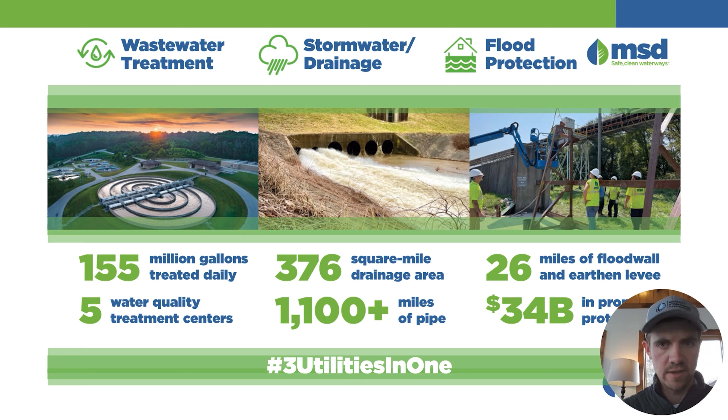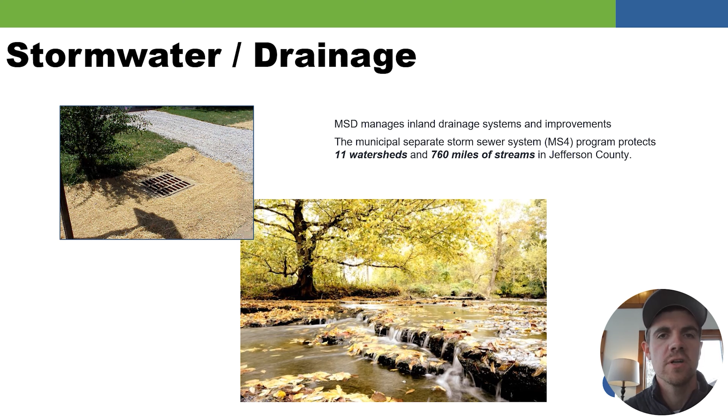All right, our post-construction runoff requirements are probably very similar to most of your communities. Our permit requires treatment of the 80th percentile rain event runoff volume from newly constructed impervious surfaces. The 80th percentile rain event for Jefferson County was set at 0.6 inches. This is only applicable to all development with disturbed area equal to or greater than 1 acre, including projects less than 1 acre that are part of a larger common plan of development or a common scheme of development equal to or greater than 1 acre. And this requirement started in 2013. So we have almost a decade

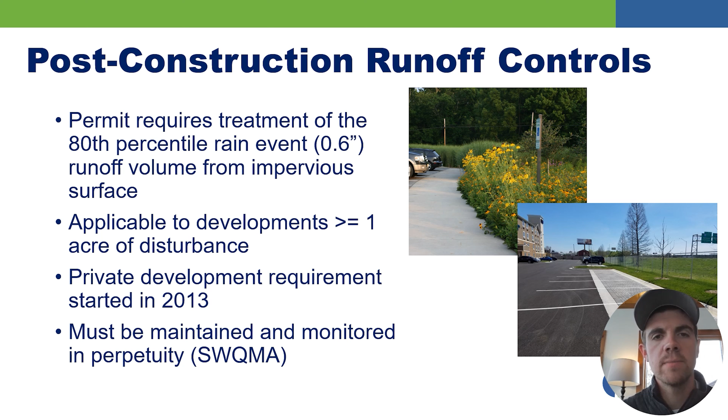working through this program. And I will also note that these BMPs must be maintained and monitored for the life of the impervious surface that was permitted. And we enforce this through an agreement with the developer or property owner, which is the stormwater quality maintenance agreement. And I'll talk about this a little bit later. And since 2013, we have added over 1,300 post-construction BMPs through this MS4 requirement. MSD also tracks the operation and maintenance of approximately 200 more BMPs that were constructed as part of our combined sewer overflow consent decree. These consent decree projects started in 2010, so MSD has about 15 years of experience managing post-construction BMPs.

And this is a map. This map is a screenshot of an ArcGIS Online map that we use to track inspections and enforcement for post-construction. And I will kind of jump into that shortly.

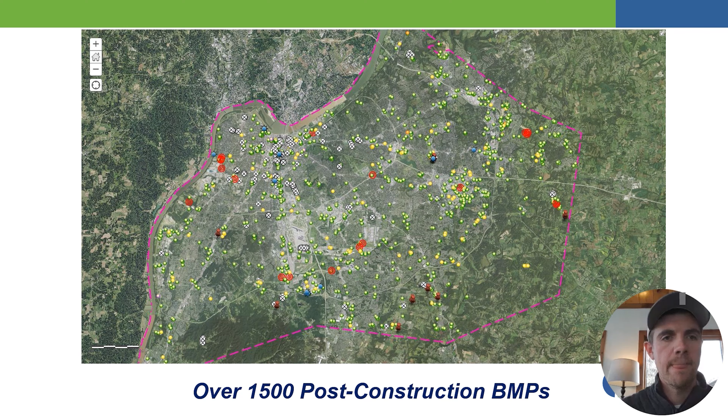All right, I'm now going to talk a little bit about how MSD meets the inspection oversight requirement of its MS4 permit. Our Stormwater Quality Management Plan, or SWQMP, currently states that we will inspect each BMP once per permit cycle. Knowing that the majority of these BMPs are not going to be inspected or maintained without a little push from MSD, it is MSD procedure to have these on a 2 to 3 year inspection rotation.

Currently, we are meeting this demand with one dedicated employee who conducts 400 to 500 post-construction BMP inspections per year. We also use a small consulting contract to supplement another 50 to 100 inspections per year. We were able to streamline the inspection process to meet this demand by going digital with the use of Esri ArcGIS Online mobile applications.

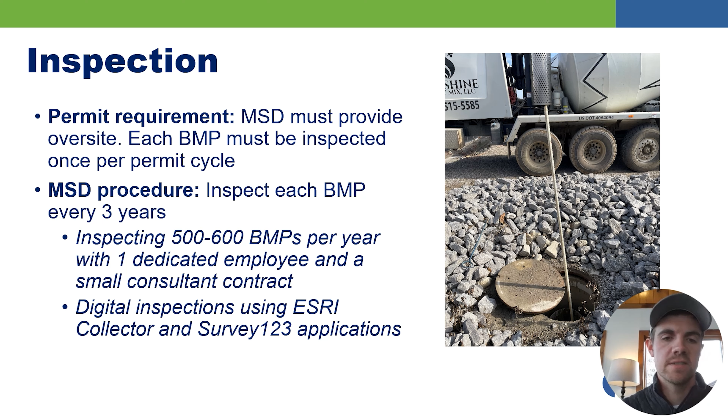And with having a GIS background, I could give a whole presentation on the benefits of ArcGIS field applications for inspection purposes. But for the sake of time, I'm going to keep this brief. At MSD, we have a database of record that our permits, assets, and work orders run through. And we use this database to create a dynamic and functional map in ArcGIS Online. And we use this map to track BMP types, locations, inspection statuses, inspection dates, among other relevant information.

And all of this information is easily accessed and edited from a phone or tablet using the Field Maps app. We've also been able to hyperlink construction plans and links to the recorded stormwater quality maintenance agreements for each BMP point. And we can easily make updates to a filter that allows us to meet enforcement deadlines in that 2 to 3 year inspection rotation. And this is something that can be put together pretty quickly and cheaply.

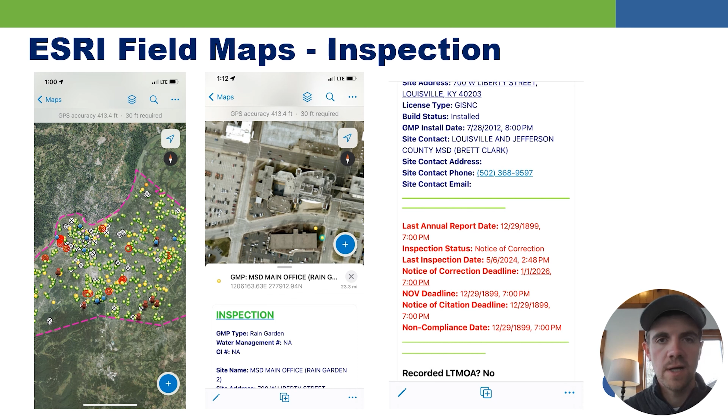And we have also created a hyperlink in the Field Maps app that allows us to automatically open and pre-populate the Esri Survey123 application for inspection. We have created a customizable form that allows us to log a full inspection for each BMP type and even attach pictures. And that inspection data is then stored in a database that can be accessed from the internet. And if needed, specifically when enforcement letters are issued, a formal inspection with MSD branding can be exported to a PDF, including those pictures.

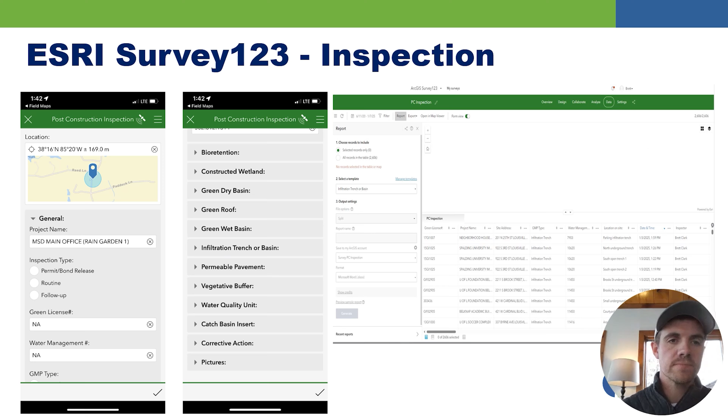All right, I'll hit on this a bit later, but we also require the property owners of post-construction BMPs to submit their own annual reports every July 1st. This has been challenging, but I think it has brought awareness to many of these BMPs for the property owners. And with that annual report, we ask for not only the inspection results, but also any documentation of maintenance that they've done throughout the year. So any inspections that they do have to be completed by an MSD qualified post-construction inspector. Again, I'll spend some time on this program a bit further in the presentation.

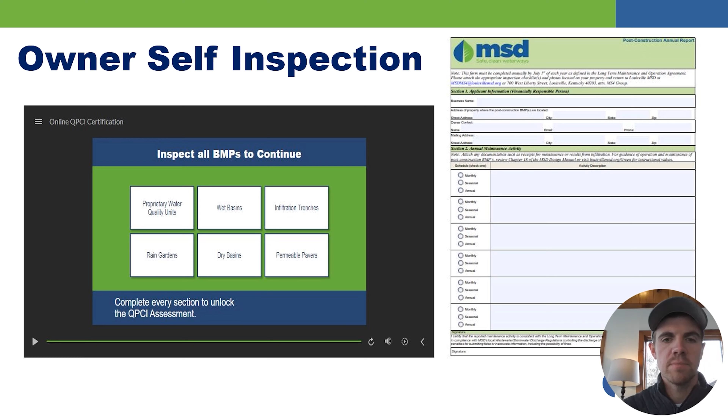Now I will hit on everybody's favorite topic, enforcement. Enforcement through our post-construction program has been a work in progress, but I do think we have developed a consistent process that works. If we go out and determine that a BMP is not meeting design standards, a notice of correction letter will be issued, and that gives the property owner 60 to 120 days to bring the BMP into compliance without further action.

And so that 60 to 120 days is based off of a matrix we developed related to maintenance severity. And we also take a look at the planting season when setting enforcement dates. We definitely do not want to force someone to plant in the middle of August, knowing that we will probably be right back into enforcement for the same exact thing next visit due to lack of watering. So an example of a 60-day due date might be a routine water quality unit cleaning with a vac truck. And then an example of a more severe 120-day due date might be just a complete rehab of a rain garden or green dry basin for ponding water.

So it kind of starts with that notice of correction. And so if that notice of correction is not resolved by the due date, then a notice of violation or NOV letter and a $1,000 fine is issued to the property owner. And this letter is sent certified, and it threatens to include a $50 per day per BMP fine if the violation is not resolved by the NOV due date. The NOV due date is set at the same 60 to 120 days as the notice of correction.

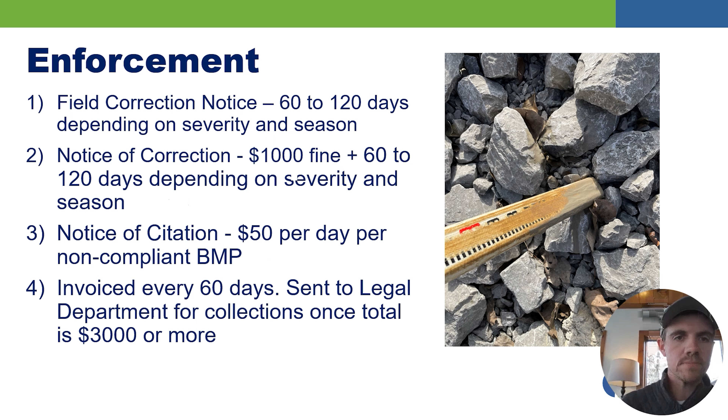All right, another important aspect of the post-construction controls program is maintenance. MSD currently owns and operates 135 post-construction BMPs. Some of these were installed as demonstration projects, others as incentives to satisfy the long-term controls program of our combined sewer consent decree, and others because we simply disturbed an acre and triggered the 80th percentile rain event treatment requirement. These 135 BMPs require $200,000 or more and growing of maintenance contracts.

We have a native plants expert and arborist who maintains all of our green infrastructure for us. And then we have a vac truck contractor who cleans out our water quality infrastructure and permeable paver sections. And this budget continues to grow with the increase in labor and material costs, as well as new BMPs being added each year through various programs.

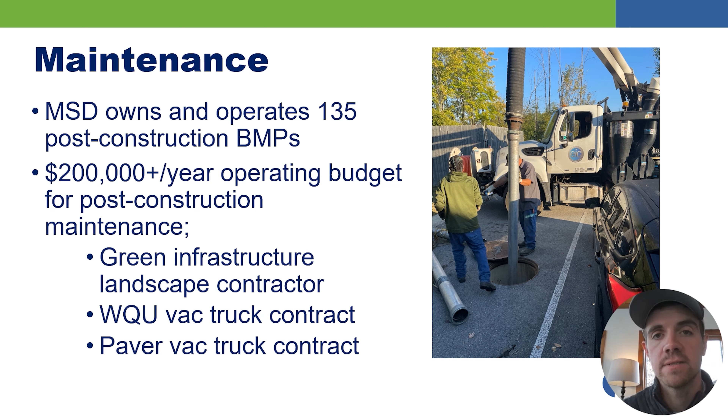Now I will dive into some of the green infrastructure and post-construction program resources we offer at MSD. All of these resources can be found on our new and improved website. First, I will talk a bit about Chapter 18 of the MSD Design Manual. This chapter specifically provides guidance for managing the water quality requirements on a project site. Chapter 18 was originally published in 2013 with significant updates coming in 2021.

And most of these updates in 2021 were a result of operation and maintenance issues we were observing in the field. We currently have 15 approvable post-construction BMPs, and I will run through some of the updates we made in 2021. So the original version of Chapter 18 had a ton of redundant and useless information. So we created a more concise guidance by editing and organizing the information better. This just cut down a bunch of pages.

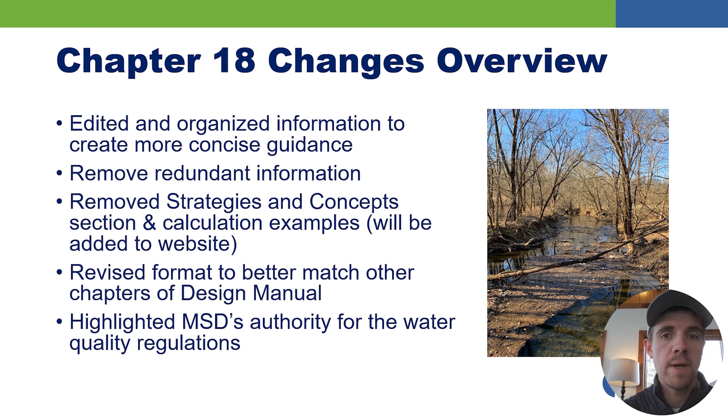There used to be an outdated section for strategies and concepts for designing post-construction and green infrastructure BMPs. We decided this would be better displayed as a tool rather than directly in our design manual. We also just needed to update the formatting so that it would match other chapters in the design manual.

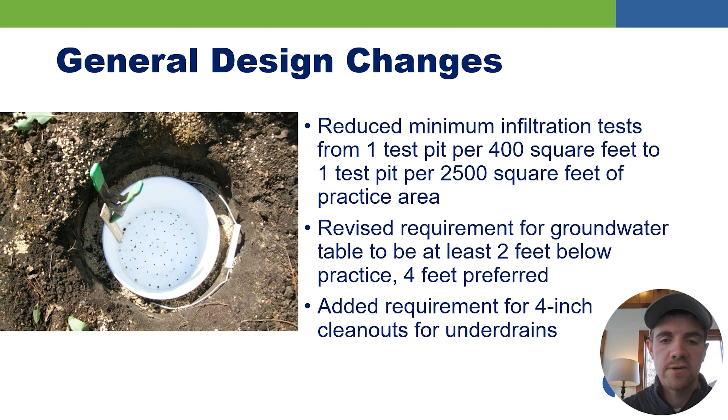Over time, we have identified some areas in the design manual that have needed updating. Soils associated with green infrastructure practices are critical. We updated the infiltration testing requirement by reducing one test pit per 400 square feet to one test pit per 2,500 square feet of practice area. We also revised the minimum groundwater table requirement to be at least 2 feet below the practice, with 4 feet being the preferred depth. And I also want to note that we added a requirement for 4-inch cleanouts for the underdrains. Again, that's just keeping maintenance in mind.

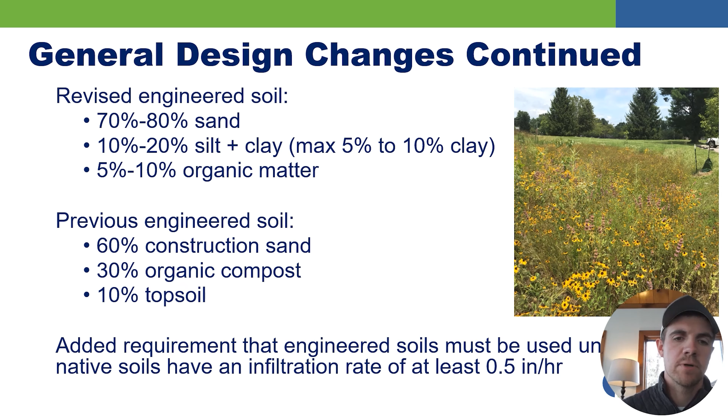And we made a simple modification to the required engineered soil mixture to include a slightly higher sand content. We also added a note that engineered soils must be used unless the native soils have an infiltration rate of 0.5 inches per hour. A few other general design changes to note. We added that underdrains were required for infiltration practices that have rates less than 0.5 inches per hour. We also revised the maximum ponding time to 36 hours to align with the detention basin requirement in Chapter 10 of the design manual. We now require landscape plans for any BMP with vegetation requirements.

And the biggest changes from our 2021 updates, we removed pervious asphalt, pervious concrete, and rainwater harvesting as an MSD approved BMP for meeting a site's water quality runoff requirement. This was due to long-term operation and maintenance failures and/or just not aligning with MSD's water quality goals and standards.

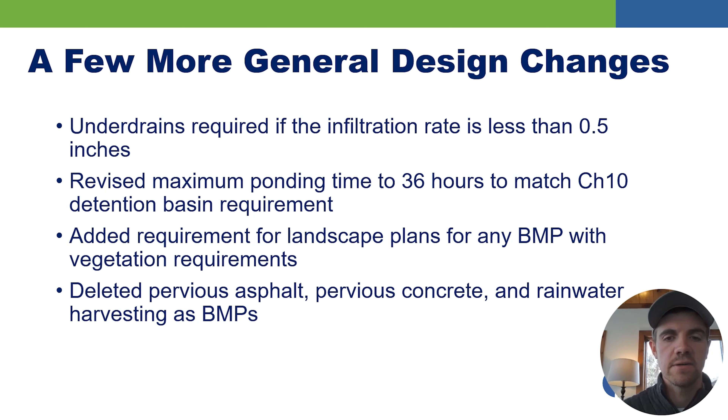A few BMP specific changes we made. We combined rain gardens and bioswales into one section. They were very similar, so that made sense. We also added a requirement that bioswales must have a minimum slope of 1% or an underdrain is needed. This was to eliminate ponding issues we were seeing in the field. We also started requiring an overflow on bioretention designs for large storm events.

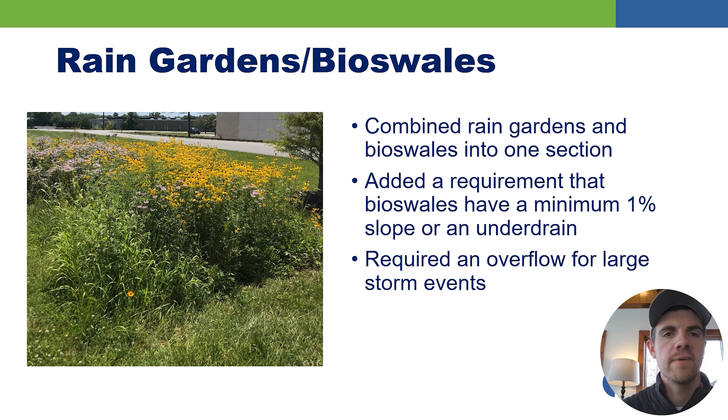We made green wet basins much more green. No longer could a developer use an existing cattle pond to meet the water quality requirements just because they had the depth and volume. We revised the minimum depth of a green wet basin from 3 feet to 5 feet to align with Chapter 10 again. And we also added vegetation requirements around the perimeter of the basin to reduce bank erosion and help filter pollutants.

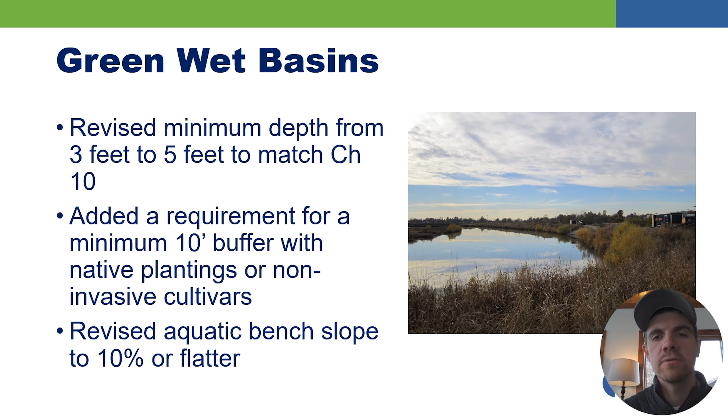And to reduce ponding issues we were seeing in the field, we added a 1% slope minimum to the low flow path of a green dry basin. And we also added the 25-year storm event for the outlet design, and we also added a requirement for non-turf grass vegetation in the basin bed for green dry basins.

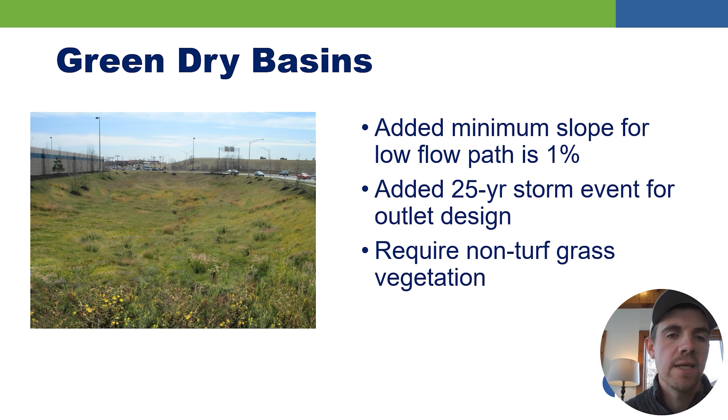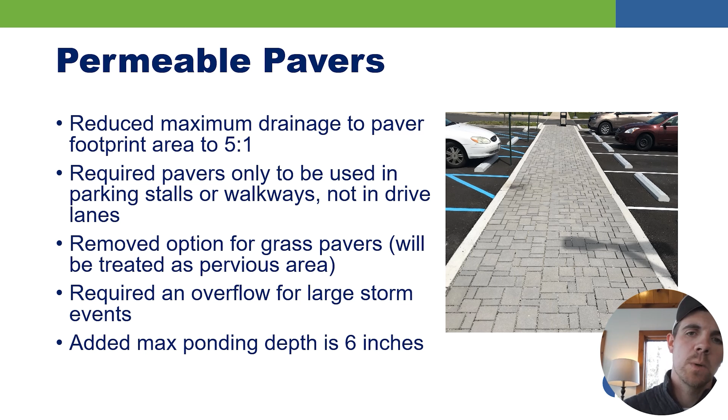And then here are some changes that we made for permeable pavers. I'm not going to go through all of them, but the biggest change is that we no longer allow paver sections to be in drive lanes due to load issues we were seeing in the field. We also removed grass pavers as a treatment option. We will, however, treat grass pavers as a pervious area.

As for water quality units, we added a maximum depth of 25 feet due to maintenance issues. Believe it or not, we were seeing instances where the sump of these units would be 30 or more feet in the ground. And this made it very hard to inspect and clean properly.

And since these units are required to be offline in Jefferson County, we did make a requirement for the weir height or offset pipe elevations of these structures to be a minimum of 6 inches. We were seeing instances where the pipes may have been less than a tenth of an inch difference. And just due to tolerance issues during construction, the majority of the stormwater was bypassing the unit for treatment.

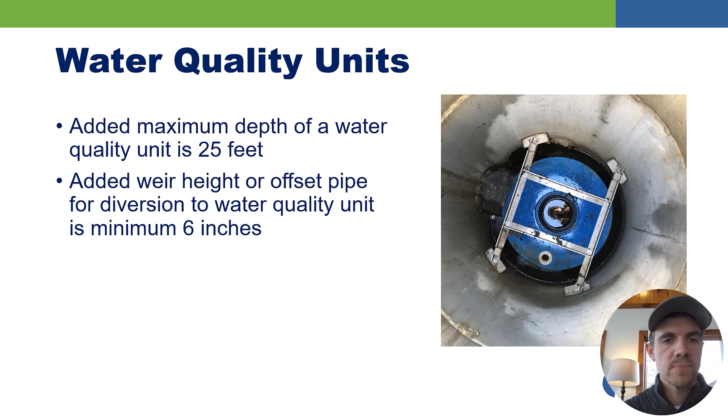So for open infiltration trenches, which we categorize as having aggregate to filter stormwater, the max flow length of the contributing area was updated to 300 feet. We also added more language to require an underdrain if infiltration rates were less than 0.5 inches per hour. And we also added language stating that the maximum drainage area shall be no larger than 1 acre or more than 10-to-1 drainage area to BMP footprint.

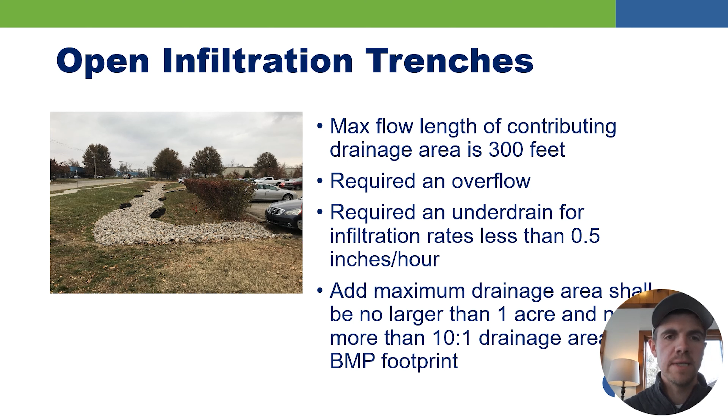And then for operation and maintenance, we reduced some of the maintenance requirements, such as the bioretention schedule. Then the big change was that we added an upon failure maintenance description, and that was basically what can someone do with the BMP that is beyond routine maintenance, whether it's a full rehab or the BMP is just not working and you've got to go back to the drawing board. So we added some guidance to that.

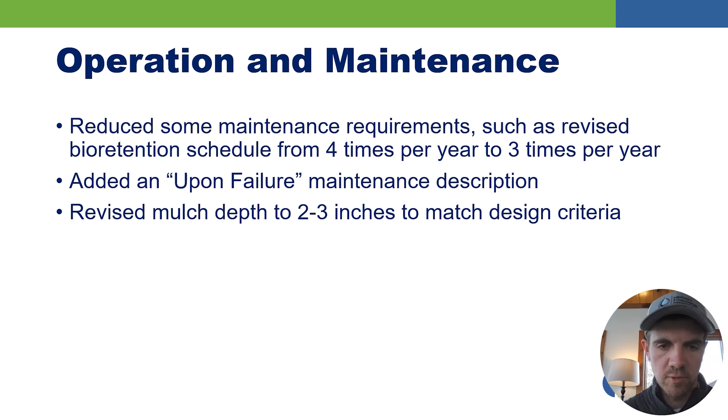And then to finish up discussing Chapter 18 of the design manual, I wanted to talk a little bit about our BMP maintenance schedules. So in Chapter 18, each BMP has its own maintenance schedules, and a lot of these were put together with long-term maintenance or operation in mind and things that we were noticing in the field. So a lot of thought went into these. So this is just a good tool for some of you all to use.

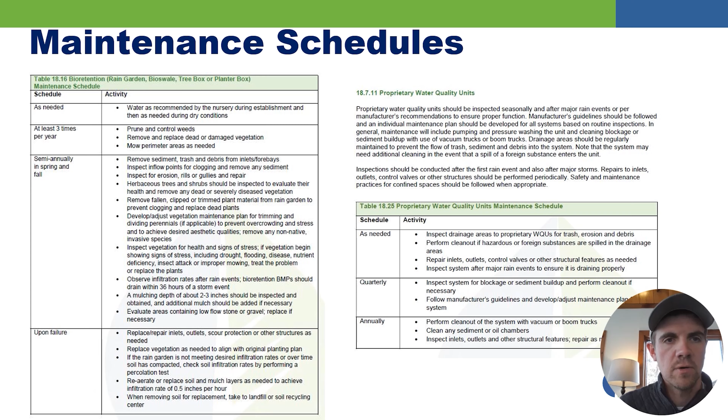All right, now I will briefly discuss Chapter 13 of the design manual. This chapter provides the user with tools to establish or reestablish native plants in areas that have been disturbed by construction activities. This chapter was updated in 2022. It has not made it onto our website yet. But first and foremost, this chapter includes a list of approved flowers, shrubs, trees that can be used in design. This chapter also includes planting guidance for design, installation, and maintenance.

And it also includes a section on green infrastructure plant guidance specifically. And then at the end of the chapter, there is also guidance on invasive species, which is a list of non-approved MSD plantings. Definitely no more bush honeysuckle along the creek.

So this leads me into our interactive plant guide tool that is available on our website. We basically created a database of all the approved plantings from Chapter 13, and I will do a quick demo of this tool before we jump into long-term stormwater quality maintenance agreements.

This is a quick demonstration for how to use and access our new interactive plant guide. If you go to our website, louisvillemsd.org, and scroll down a little bit to the middle of the page, you will see a water quality icon. Click that. Scroll down again, and you will see a post-construction icon. Click that. And now in the middle of the page, you will see our MSD plant guide.

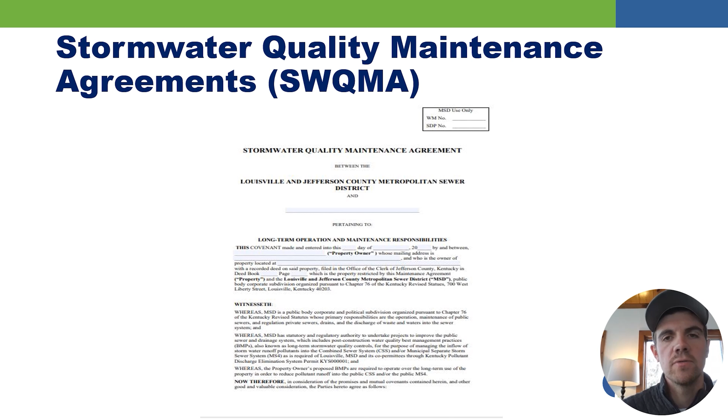So here at MSD, we have access to some amazing GIS data through our Louisville Jefferson County Information Consortium, or LOJIC. But you'll definitely want to use the PVA data from your community to ensure that the address and property owner are correct on these agreements. You'll also want to ensure that the property owner referenced in the agreement refers to the correct deed book and page. Most PVA data sets will have all of this information.

So next, you will want to make sure that the signature is original and that the person signing is authorized. I'll talk about how to check this on the next page. Just make sure that the signature is the original and it is not a copy.

That's the main part. So using the Kentucky Secretary of State's business entity search, you can type the property owner or business name to access information related to that business. And then if you click on the current officers tab, you will get a list of authorized members. If the name on the agreement is not listed here, you will need what is called a corporate resolution, or just further legal documentation proving that the person who signed the document has the legal authority to do so.

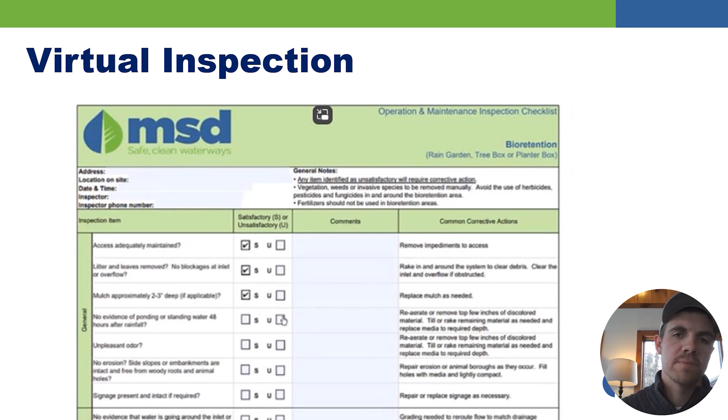The online QPCI allows the user to look at real-life photos and complete a virtual inspection using BMP-specific checklists. Once the user has successfully completed all 6 of the BMP modules, they have to take a quiz, and the passing score is 80%. At that point, a Microsoft form will pop up, and a certificate and inspector number will be generated based on the form answers and emailed to the user who completed the training. The certification is good for 3 years.